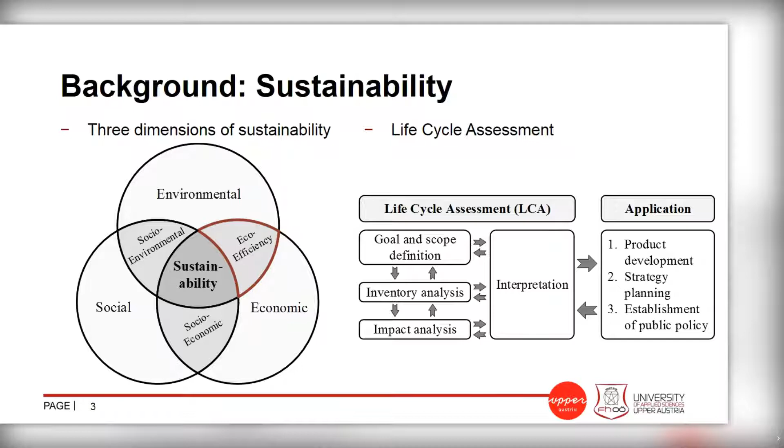There already exist a lot of methods for analyzing the sustainability of products or services. One well-known method is the life cycle assessment, where you want to analyze the impact of a product. You have typical steps like the goal and scope definition. Then you have to gather all aspects, all data, and then analyze the impact of this product and also interpret it for your daily work in product development and strategy planning - what you can do with this aspect.

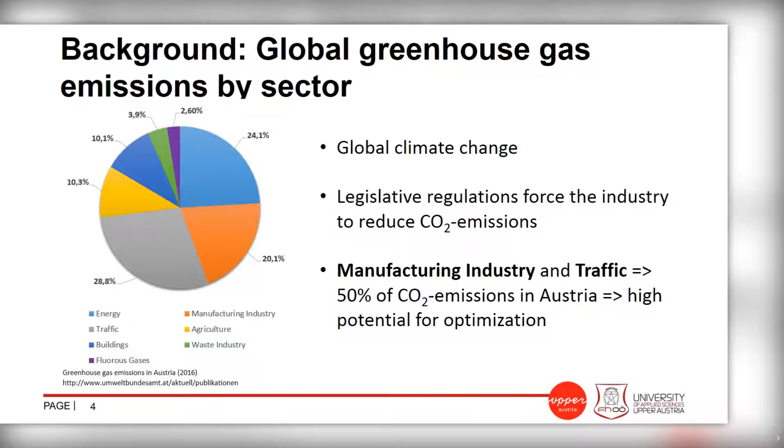On the other side, the question will be, how can mechatronics help it? If we look at global greenhouse gas emissions, for example, I have a diagram from Austria showing that 50% of the CO2 emissions are coming from the production and manufacturing industry and also from traffic. And here also mechatronic systems can help us.

Another important aspect we have to consider is how can I manage the environmental indicators, which indicators are necessary for the different aspects, like focusing on the carbon footprint, land use, air pollution, and so on, or if we only focus on the results, the global average temperature.

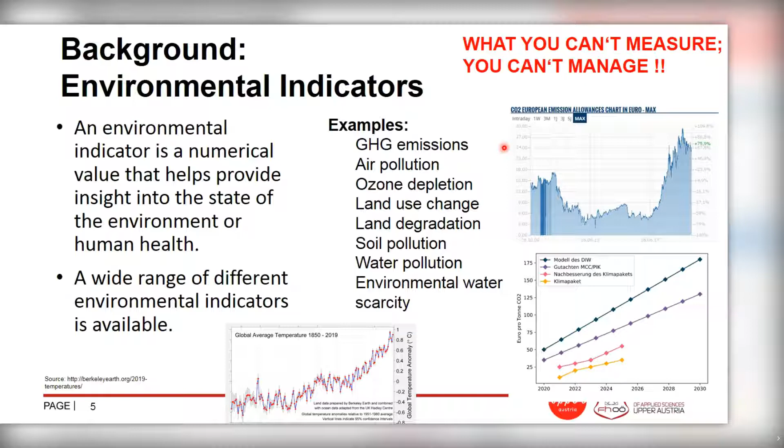And also we have economic aspects. We have a price for CO2 emissions, especially if you can see a chart from Europe in the last years. How can mechatronics help this?

Mechatronics is the integration and interaction of different disciplines like mechanical engineering, electrical engineering, IT, and control design to help promote a cleaner future, and especially to reduce - this is one aspect of Eco-Mechatronics - the ecological impact of such mechatronic systems during their whole life cycle.

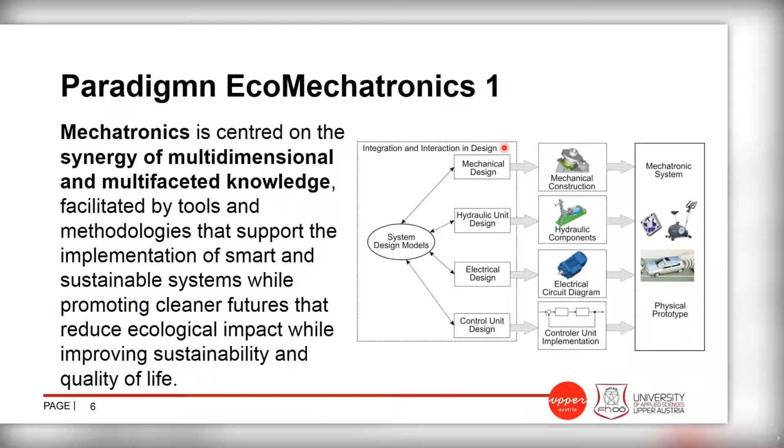Also, the vision of Eco-Mechatronics is to improve human behavior and also the quality of life. Currently, we have some transformation processes in industry. For example, 10, 20 years ago, we started with digital transformation, known as the term smart manufacturing or Industry 4.0.

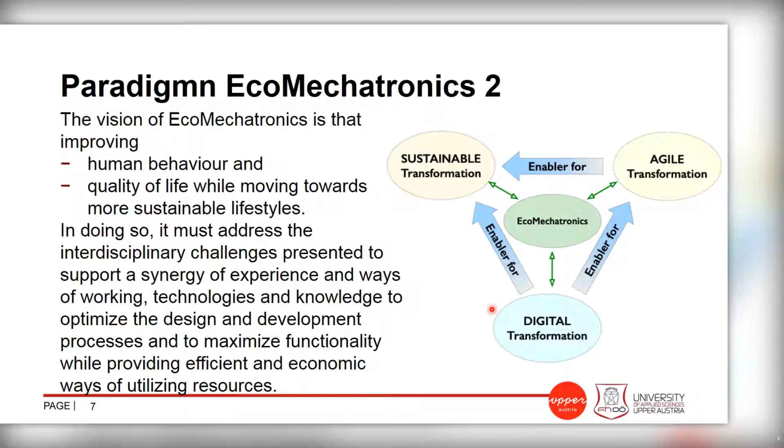This is also, from our point of view, an enabler for the sustainable transformation. These two terms are also called twin transformation. And also we have to modify and analyze the different processes, different technologies, and working with knowledge in companies, so an agile transformation process is also very important. Therefore, Eco-Mechatronics helps support these different transformation processes in companies.

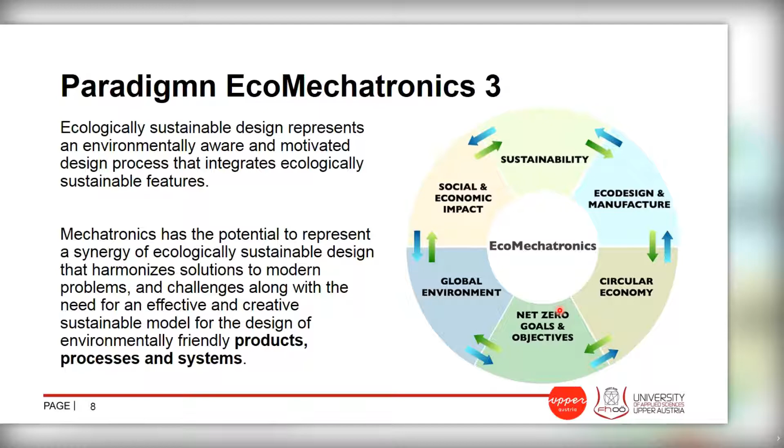And here also the different environmental aspects are represented. You can see in the figure on the right, we have the focus on the global environment. Also a very important task, which I want to discuss with you later, is circular economy, the design process, and also the net zero goals. So Eco-Mechatronics can be a sustainable model for the design of environmentally friendly products, processes, and systems.

If we go into more detail in Eco-Mechatronics, it is always very important to analyze the whole life cycle of a product, to have a holistic view on all life cycle stages. You can see here the 5 main stages in a life cycle of a product.

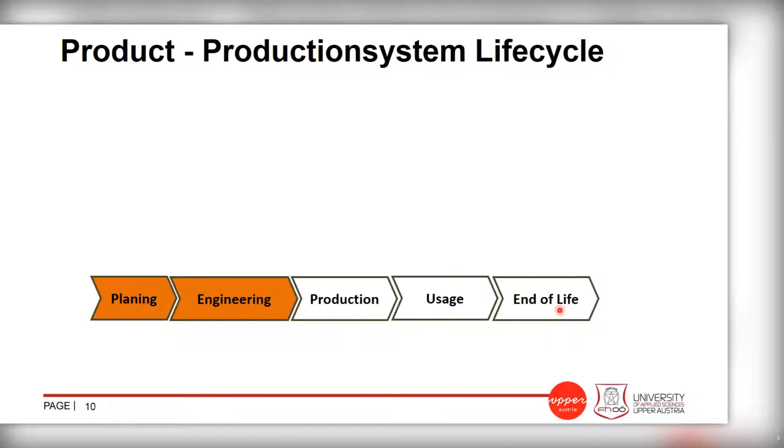You will start with the planning process, where you have strategic planning, where you define the concept of your product. Then you have a very important phase, the engineering phase of our product, where some methodologies on eco-design can help. Afterwards, you have the production of the product, of the mechatronic system.

Then you have the usage, where you also need some specific monitoring service systems. And at the end, you have the end of life of our product.

You have also the same phases if you focus on the product being produced by a production system. You have the same phases in the life cycle of a production system: you have to plan this system, you have to engineer it, and then you have the interaction between these two life cycles in the operation phase.

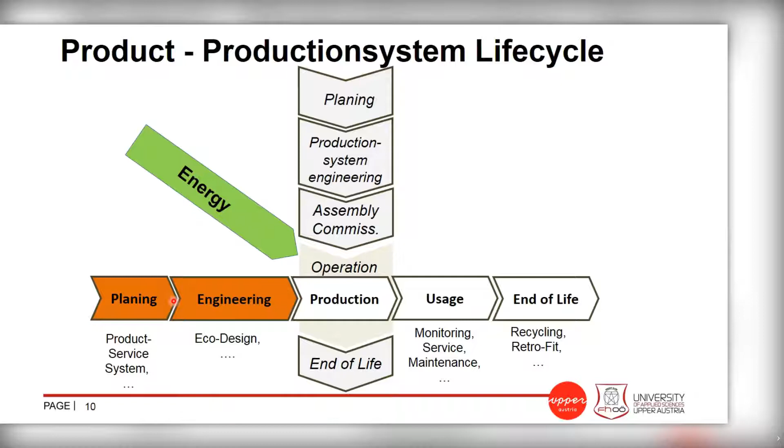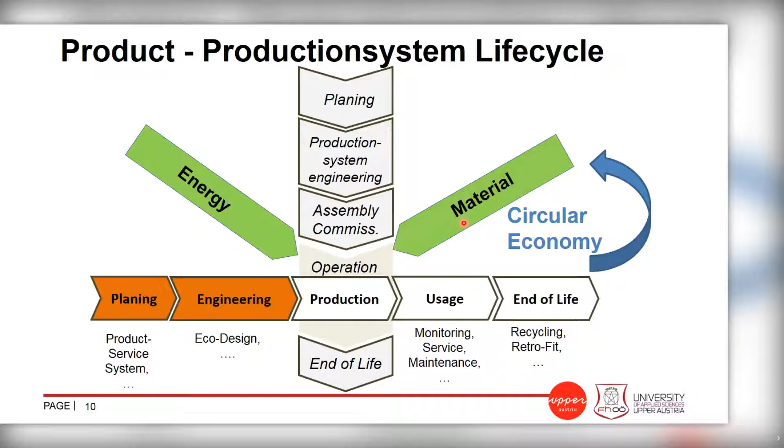This is also, for environmental aspects, very important. For the production of our product, we need energy and also we need materials. Therefore, it is also a very important loop to use these materials for the production. Then you use the product, and at the end of life, you will reuse these materials. You also know the term circular economy.

Now, from our design point of view, the early design phases of a mechatronic system are very important because we have a high freedom of action to improve and influence the environmental properties of the mechatronic product. But this is also a challenge for us.

The knowledge which we have about the product is very poor. But in this conceptual design phase, we make the main decisions for the success of a product and also the environmental impact of the overall system. Eco-Mechatronics can help us to improve the decision process in these early design phases.

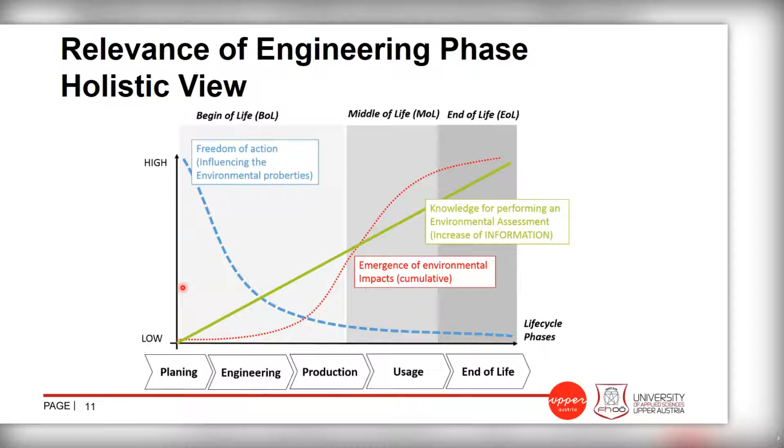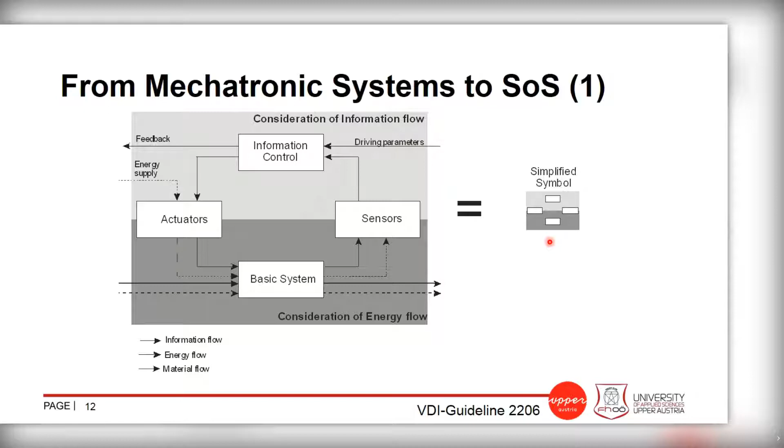And then in the virtual or cyber room, we have the information control of this system. So typically, a mechatronic system is the interaction between these different disciplines. We have some aspects on the physical parts of the system and some aspects on the cyber part of the system.

In larger systems, we have not only one mechatronic system, one production system, but a network, for example of production systems, and this network is physically connected and also has an integration network of computation. Therefore, the term cyber-physical systems is used. And if I connect all the systems, then the term systems of systems is used.

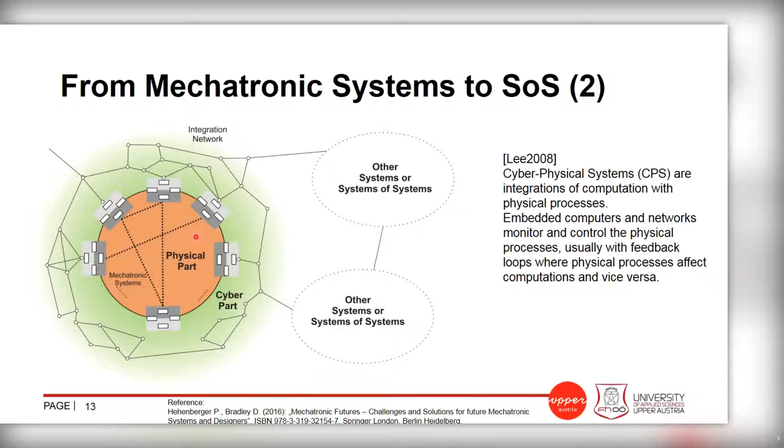These are some aspects of the digital transformation of mechatronic systems. Why is this important in the Eco-Mechatronics paradigm and for environmental aspects in a system? I give you a simplified use case.

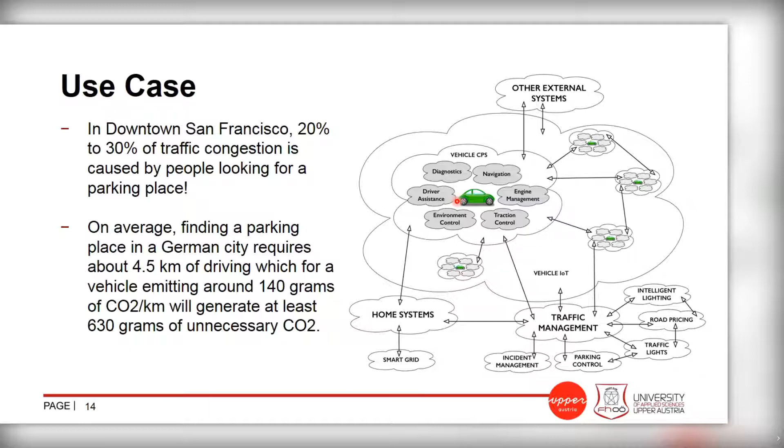In this simplified use case, which was prepared by David, you will see that in cities like San Francisco, 20 to 30% of the traffic is only people looking for a parking place. Now such a digital system can help to reduce this traffic in such cities and also helps the environment to reduce the carbon footprint.

On the other side, the Eco-Mechatronics paradigm is also the evolution of different applications. If you look at typical mechatronics 50 years ago, you have some systems, sensor systems, industrial robots.

Now we will go more to a cyber part, also to integrate virtual models related to a cyber-physical system. Afterwards, you can go to cloud-based systems, Internet of Things, where Eco-Mechatronics is one building block to support this aspect, like smart cities, smart home, what I have shown, and autonomous vehicles.

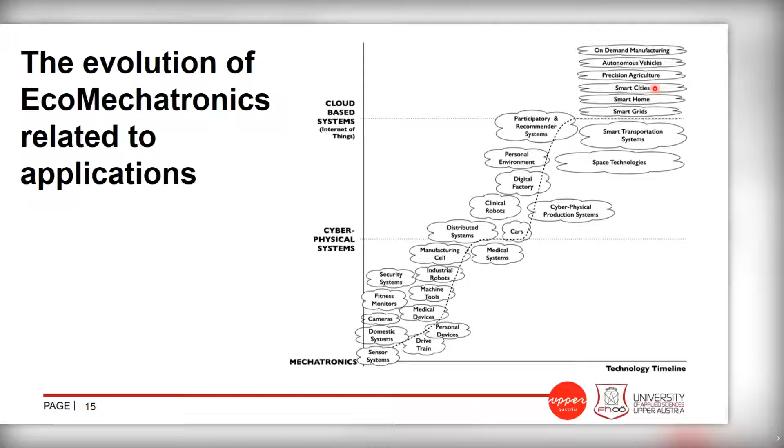On the other side, it is important that we also take into consideration modeling and simulation techniques. Therefore, the term digital twin exists. Digital twin means the interaction between the cyber world—the data, the models, the information—and the physical world. And between these two worlds, I always have an interaction to describe the properties of the system, to analyze the real condition of our mechatronic system on different system levels.

And therefore, it is also possible to predict the system properties in advance for the future. This is also a very important aspect which helps Eco-Mechatronics.

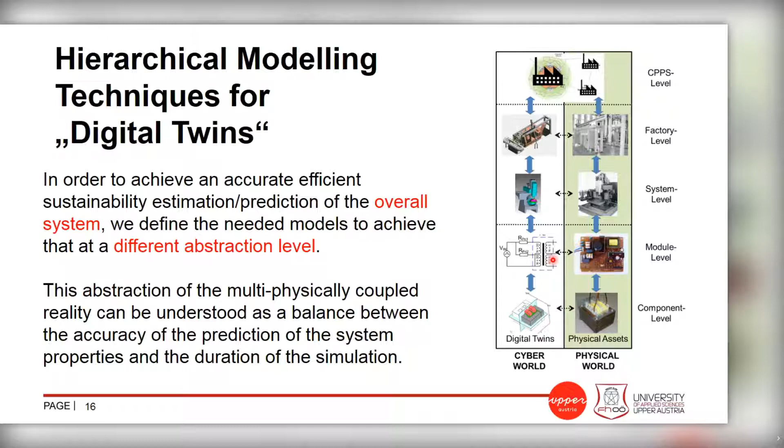At the end of the presentation, I want to give you a quick overview about one possible use case. I will present some activities of the Horizon 2020 project, Energy Efficient Manufacturing System Management, which helps reduce the energy consumption during the production of different systems.

Maybe you know terms like factory of the future. Therefore, we have, as I mentioned before, to integrate all different aspects of digitalization to get an energy sustainable solution related to energy consumption, energy costs, and also CO2 emissions.

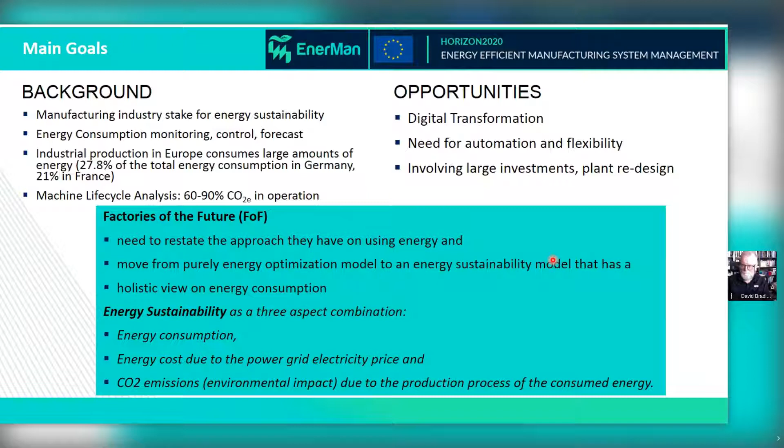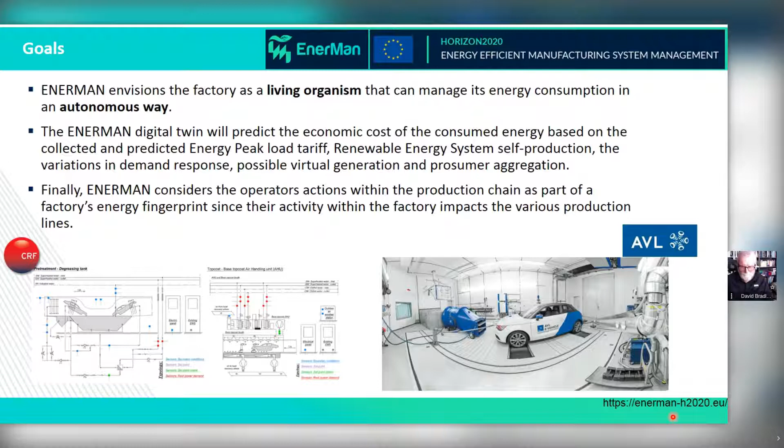If I look at my clock, I have only one minute to show you some details of this project. You can also find a lot of information on the website of the project, where the goal is that the factory is a living organism to reduce energy and costs in a production plant.

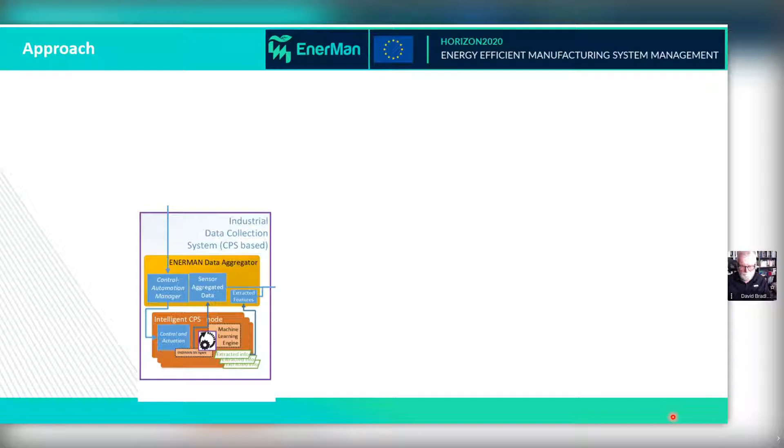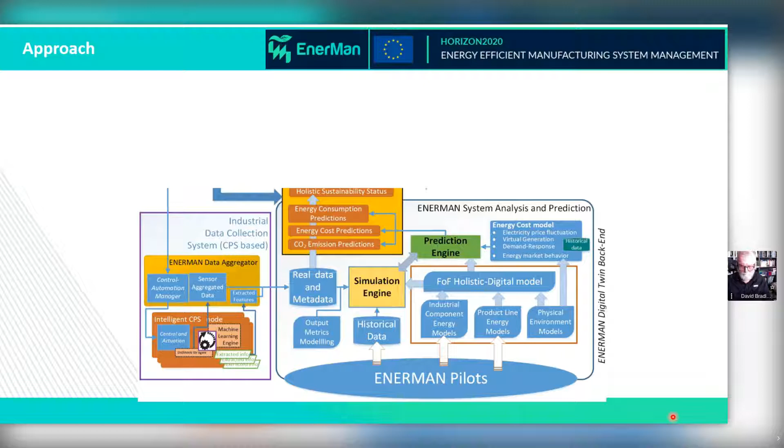Therefore, the overview, the approach which will be used, we have discussed before. One important aspect is to have information, data from the industrial system, like a cyber physical system. Then you need models to simulate the process and also predict the energy flows in the future. At the end, you have to integrate all this data, maybe with big data analytics, to have decision support during the production process.

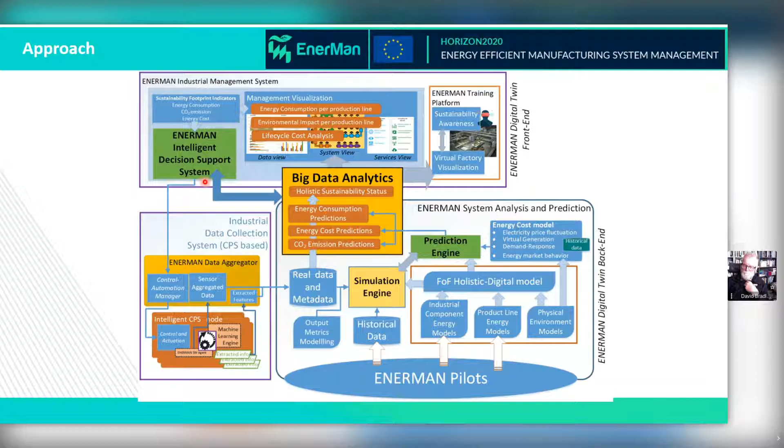This project shows you that the different aspects of Eco-Mechatronics are used there to reach a sustainable solution for a production system.

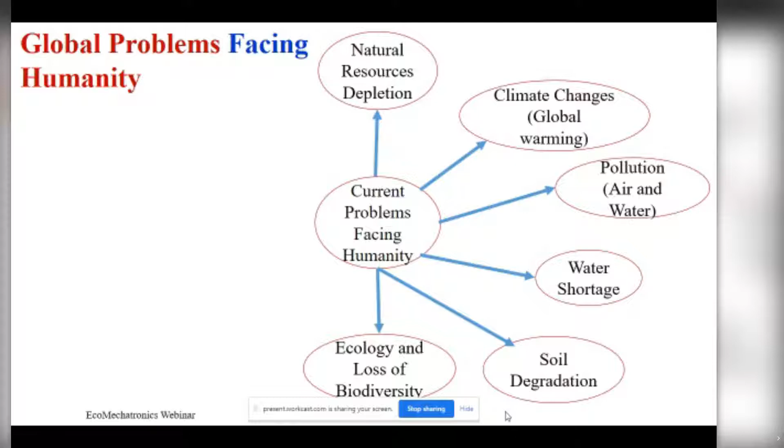Also, the deforestation, when you're removing trees, an essential element integrating into its life cycle a lot of species and ecosystems, removing them is heavily affecting the environment and the chain in the ecosystem itself.

We have ocean acidification due to the release of a lot of polluted chemicals, the overpopulation in the world and the demand for space and all the lifestyles that support such populations. And we have waste disposal. In general, there is a lot of effort to reduce its effect, but still it is considered an unsustainable waste technology.

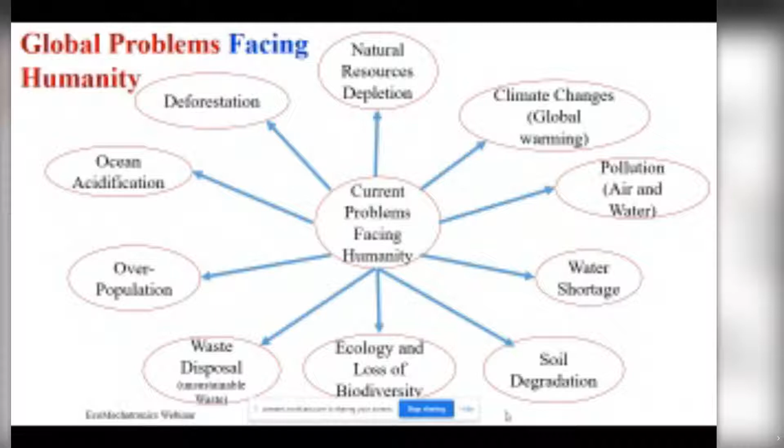So from that, we can look into the why of Eco-Mechatronics. I was trying to put a definition, but the definition is not the definition, because the field is still at an early stage and still open to be evolved and take shape in a good way through the activities of many researchers in the field.

But I can state that Eco-Mechatronics can be defined as an interdisciplinary and visionary field, evolving to a holistic impact on the development of current and future technology. Such future technology may include smart technologies, methodologies, algorithms, techniques, products, systems, and processes. While developing this, the focus is going to be on sustainability, ecology, economy, and circular economy.

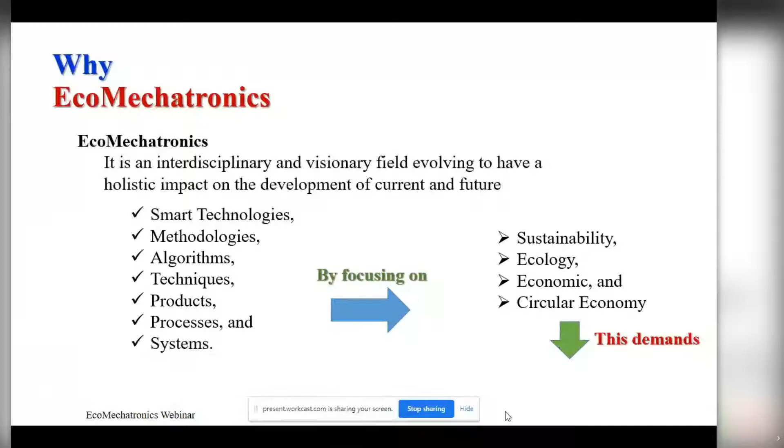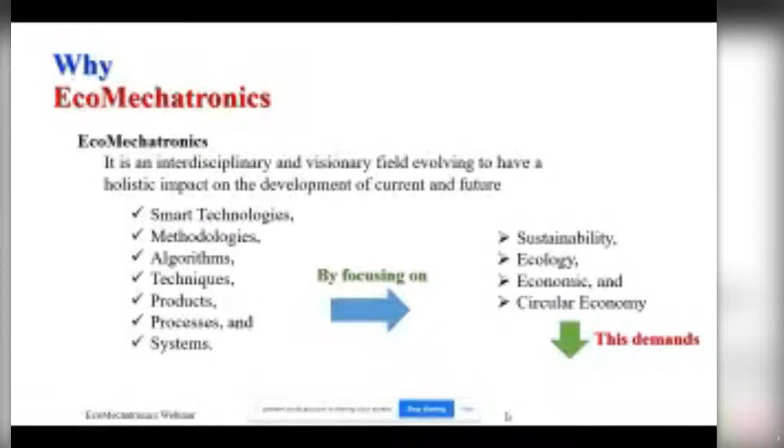The circular economy plays the role of management, to facilitate and maximize the outcomes of effort in such development from the Eco-Mechatronics side, reflecting on sustainability, ecology, and economy. To achieve this goal, there is a need to develop novel design strategies supported by creative thinking leading to new ideas. So here, Mechatronics is associated with new thinking and the development of innovative new ideas.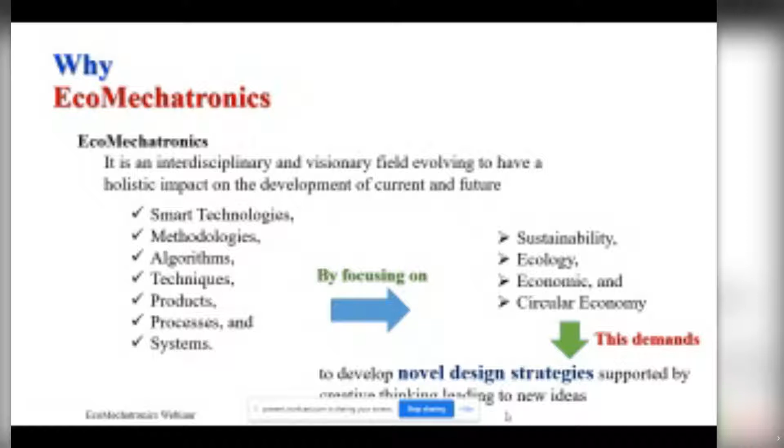The aim is to address interdisciplinary challenges with a potential synergy where in experience and way of work, in technology, and in knowledge, all of that are going to contribute to optimize the design development process and maximize the functionalities.

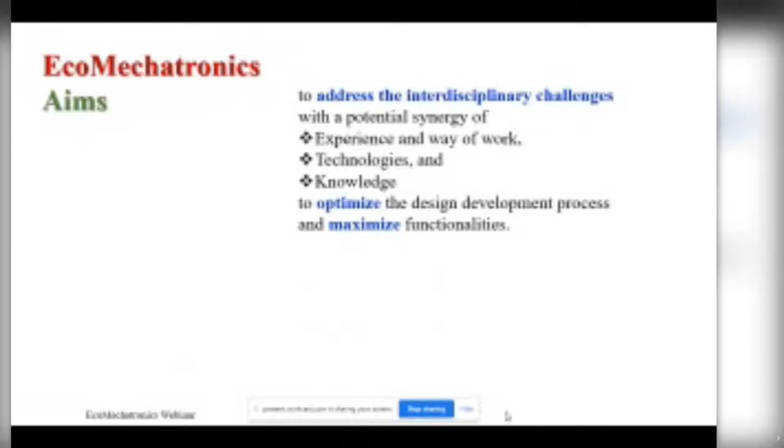So the synergy here is leading to develop a new energy efficient, renewable and clean energy, economical, sustainable, waste reduction or elimination. The target of the Eco-Mechatronics is not just to reduce, it's to eliminate, but along the process it can go into different stages and have environmentally friendly technologies in general.

Once again, the circular economy concept is playing a key role to combine all of these efforts that are going to facilitate and manage the outcomes leading to an ecologically sustained society.

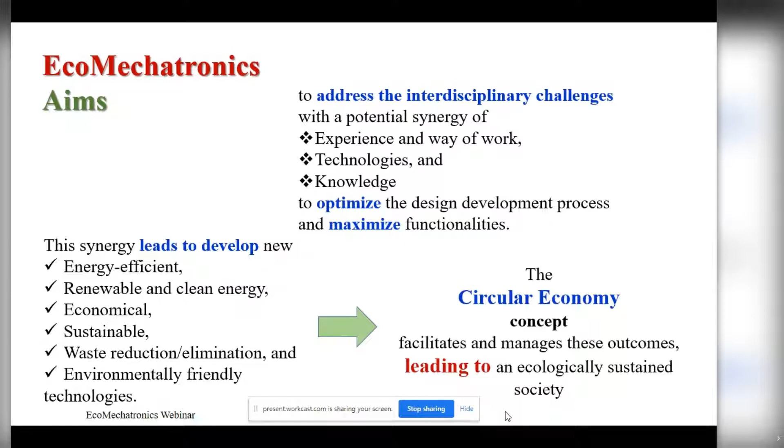So when you talk about the evolution of the Eco-Mechatronics, already we are feeling it, sensing it, and seeing it growing gradually, to support the effective design and development of Eco-Mechatronics product systems and processes. The vital issues we need to understand through this process are the application, the consideration of the application, the ecosystem, the environment, sustainability, and the eco management for effective outcome.

Because all of the problems facing the world have a direct effect on the ecosystem. When you are developing a technology, the consideration of the ecosystem is very critical, because that will tell us and guide us about the whole process of the contribution of the developed technology on the environment, and also the cycle time of such a technology within the ecosystem consideration.

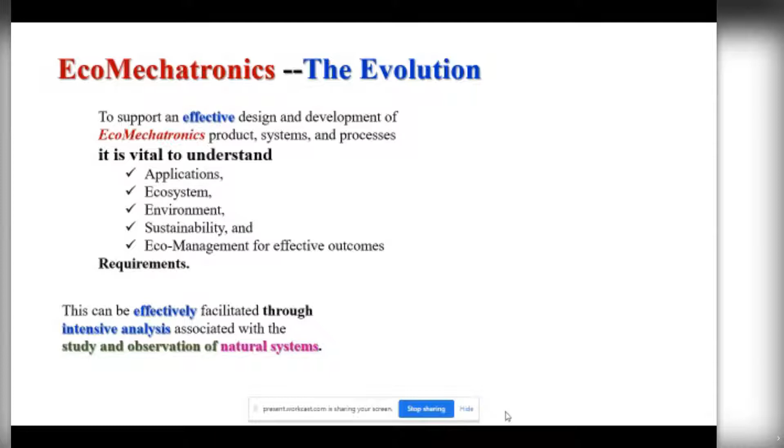So this consideration is effectively facilitated through intensive analysis associated with study and observation of the natural system, because nature will be a very good lesson and model for us.

It is to consider the goal, aiming to have a conscious conclusion to emulate nature's best properties and functions. Nature includes all physical systems that we can learn and understand and reflect out of, to support the development of new technologies, specifically led by the Eco-Mechatronics field.

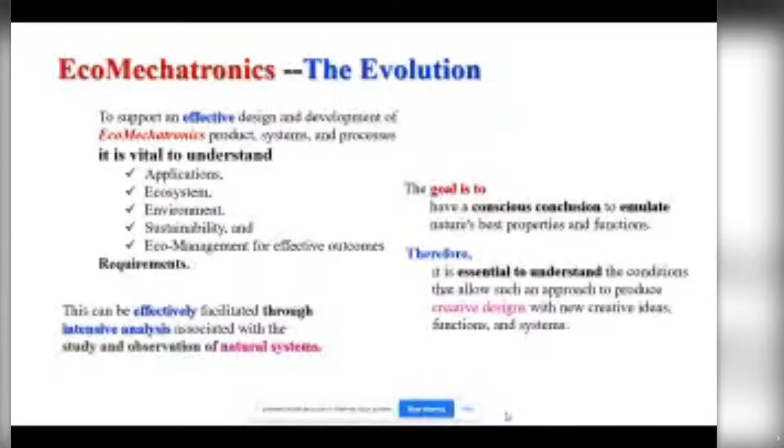Therefore, it is essential to understand the conditions that allow an approach to produce creative design. This creative design leads to creative ideas, functions, and systems. Creative design by nature is a potential way to support environmentally friendly and innovative technology development.

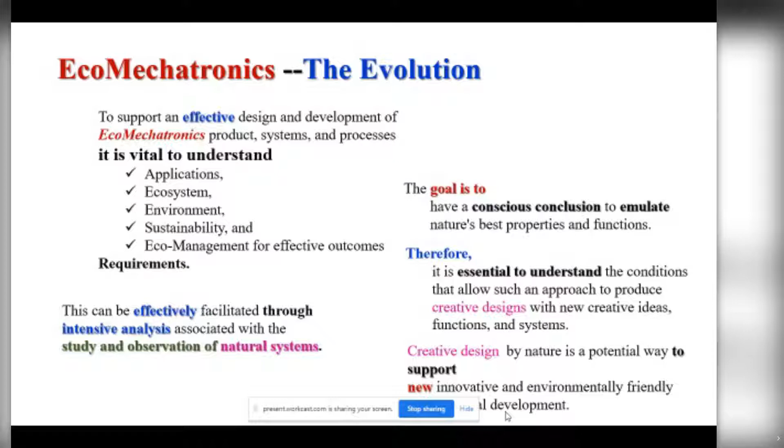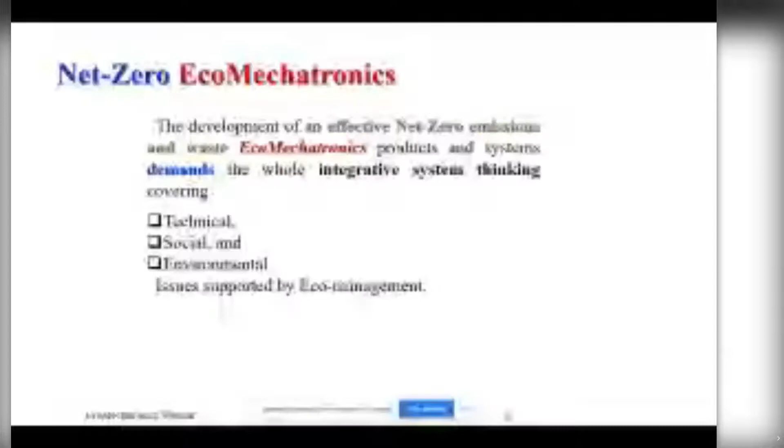All is aimed at having a net zero emission and waste in general. We are aiming, through this technology or through this field, to show that the Eco-Mechatronics is going to contribute to this goal, and the development for the Eco-Mechatronics products and system demands having a whole integrated approach.

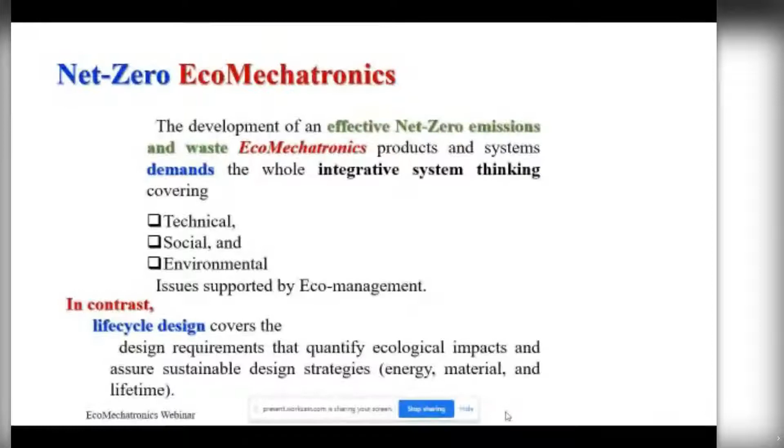For the purpose of having a net zero, Eco-Mechatronics needs a whole integrated system thinking covering technical, social, and environmental aspects. This issue is going to be managed properly through eco-management. In contrast, life cycle design is normally influenced by the view of considering energy, material, and lifetime, without linking the matter with the ecosystem and subjecting it to the eco management and social aspects of that.

So we need to think about what kind of current evolving technology is going to support the evolution of Eco-Mechatronics. We have many aspects of technology currently used that are evolving, some of them, and some are still in the early research of development. I'm categorizing these technologies into five groups.

The first group is related to computing. So we have distributed and optical computing, DNA data storage, miniaturized computing technologies, molecular computers, neuromorphic computers, quantum computers, etc.

And we have digitalization, where there's a huge effect and focus on digital transformation. This includes a lot of domains in artificial intelligence, blockchain applications relating to that, cybersecurity and privacy protection, digital twins, real-time insight, optimization, and decision making.

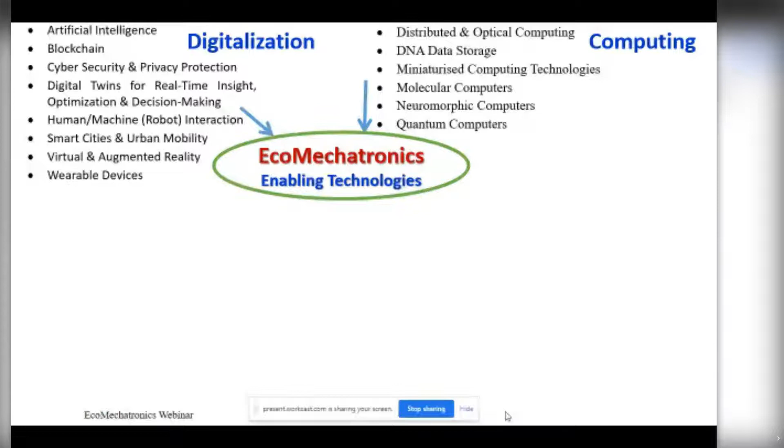We have human-machine interaction that supports a lot of issues, one of them related to robots and robot autonomy. We have smart cities and urban mobility, virtual and augmented reality, wearable devices, etc.

And we have another category supporting as enabling technology for Eco-Mechatronics: the artificial intelligence domain in general, which includes a very wide range of activities, almost involved in all domains of development related to smart, intelligent decision-making, machine learning, real-time learning, deep learning.

We have autonomous systems, obviously seeing autonomous cars, robots, vehicles, drones, undersea, etc. We have big data, data analytics, and data fusion, connected devices, Internet of Things, CPS, etc., real-time interaction, and a wide range of applications.

We also have huge evolving activities and research in the domain of nanotechnologies, ranging from biophysics, micro and nano manufacturing, nano computation, nanomedicine, nano robotics, nano smart materials, and green technologies.

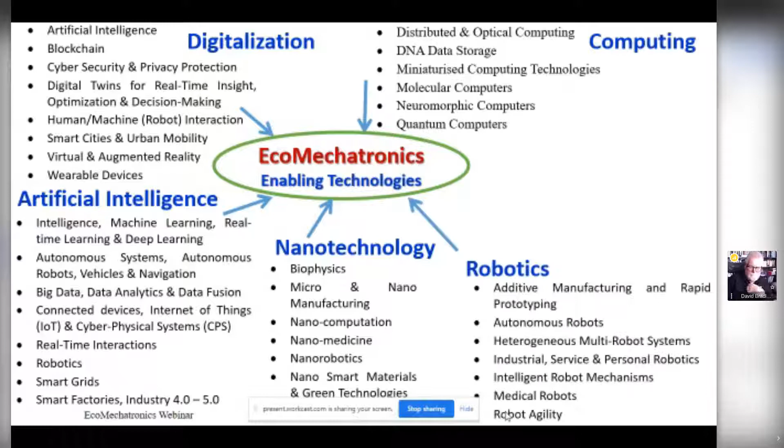We have also huge development at the level of robotics, from additive manufacturing and rapid prototyping, to autonomous robots across the spectrum of air, sea, and ground. We have heterogeneous multi-robot systems involved in many applications, either co-located within the same application space or distributed around the globe, and intelligent mechanisms for reconfigurable, agile, medical robots, etc.

In general, we can categorize the huge evolution and development of service robotics, supporting human beings in different dimensions, and also the development of personal robots besides the focus on industrial applications.

We have the development of sensors and actuators that give flexibility to different developments, either on the robotic side or the nanotechnology side or other levels, to give knowledge through abstracting information from the working environment and decision making into action. This normally comes from sensors and actuators, and we have different enabling technologies in this direction, coming from actuator design technologies, biosensors, bioactuators, nanosensors, nanoactuators, wireless sensor networking, sensor actuators, and smart materials, etc.

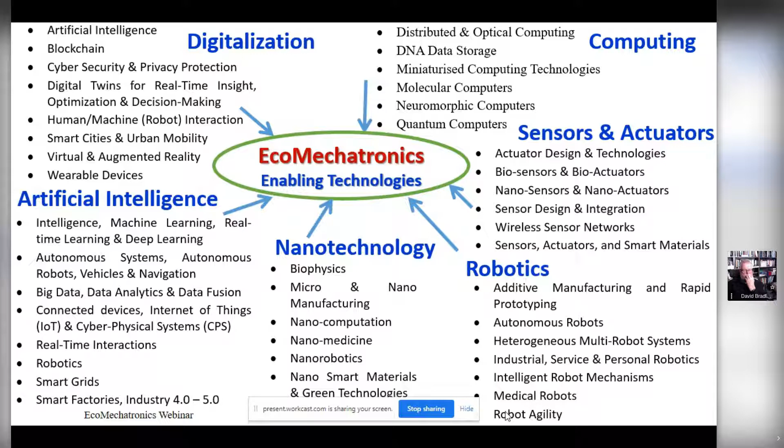Future prospects: when we're talking about future prospects, the eco and sustainable design strategies are critical issues facing the development of the field, and focusing on this issue is very important.

This will come from the development of technology supporting eco-mechatronics, from the materials that facilitate this development, the processes themselves and how to make them more effective, efficient, and innovative, and developing accordingly intelligent systems that facilitate that, with future technology applications mainly focusing on managing the ecosystem in order to achieve the target of developing eco-mechatronics itself.

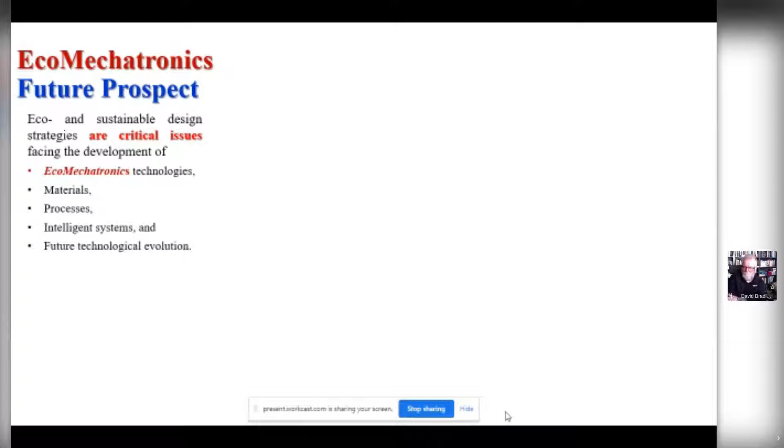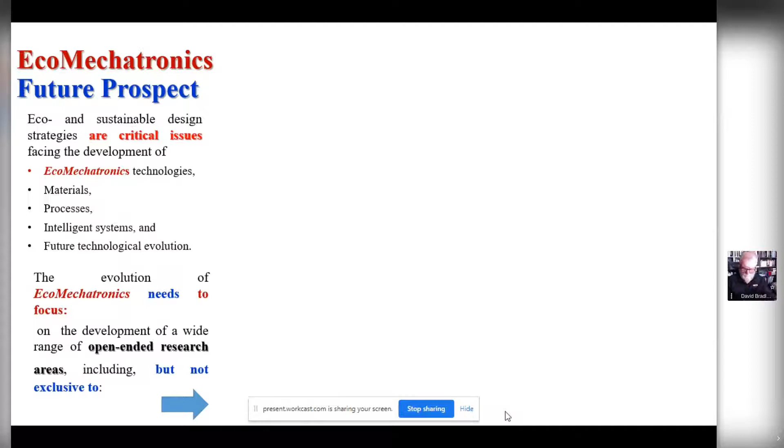Such evolution of eco-mechatronics needs to focus on different areas of research from now ahead into the future. This research is open-ended and will continue in the future. Besides, it needs additional development to continuously support the field. Some of these are listed here - I'm just going to show you the list without going into the details.

It comes from the computing level, agile systems, intelligence, biosensors, clean energy, and energy consumption technology to have lower consumption technology, distributed data analysis, decision making, eco design, management, and circular economy, and to spell out fully autonomous systems, biohybrid robots, green technologies, and eco-friendly solutions.

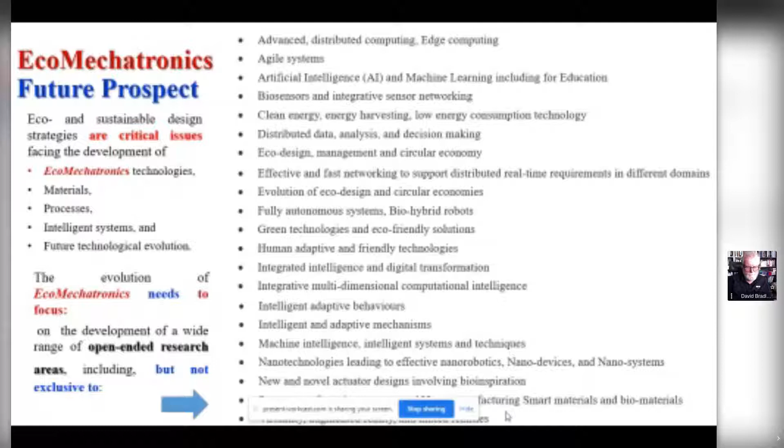We have other levels from intelligent adaptive behaviors, intelligent and adaptive mechanisms, machine intelligence. So we have a huge list of developments evolving, and all of these are open-ended research topics. As I said, we are not limiting the list to this - rather it is an open-ended example of possible research areas.

Finally, responses to mechatronics come into three levels and actions. The short-term level we already can feel and sense. This is going to use existing technologies and synchronize them with the degree reflected by the background of eco-mechatronics, coming through research already done, through publications, through books, through different organizations focusing on the issue of environment, sustainability, and circular economy.

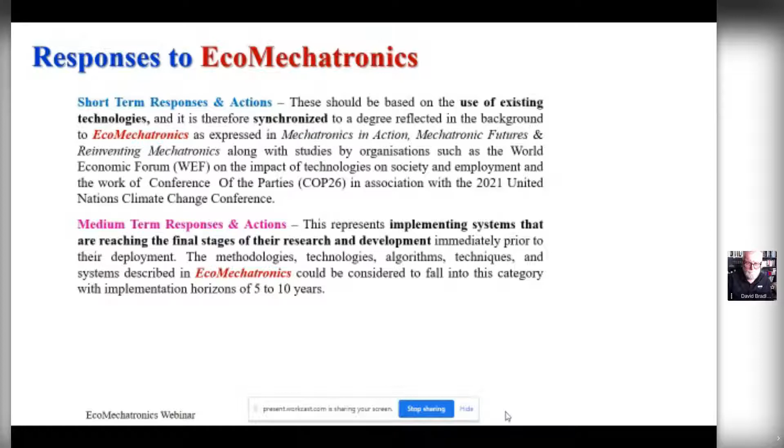We have work on medium-term responses and actions - this is normally implementing systems that are reaching a final stage of their research at this time, because there is development and then applying that development to real projects. So this research is before reaching the project and industry level. This will be evolved in the medium term, between 5 to 10 years, to see different new technologies, methodologies, algorithms, and techniques adapted to support the evolution of eco-mechatronics.

Finally, we have the long-term responses and actions for the field that will be initiated with new work, new teams, new topics. Researchers are going to consider reflecting the key elements I mentioned earlier - sustainability, environment, economics, and managing these through the circular economy.

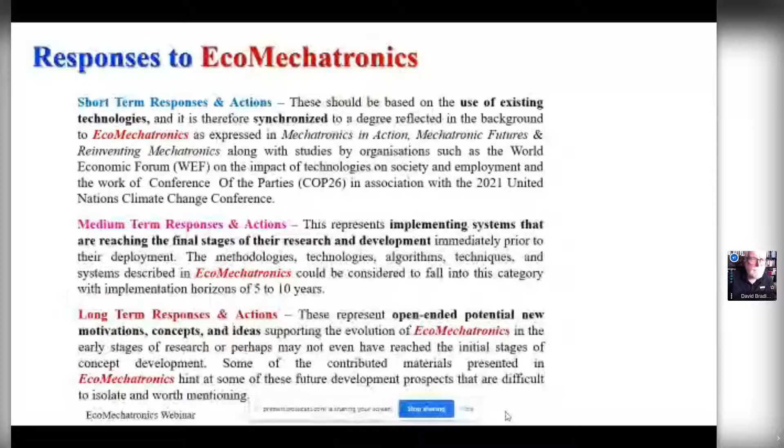Okay, Peter, can you hear me? Yes, David, I can hear you. I'll just wait for Mackie to come and check there, and then we've a number of questions.

The first question is from Caetano Peng, about the cost of implementing Eco-Mechatronics. Could this be a barrier in many industries and sectors, and do we have any idea of the basic costs associated with implementing the technologies you've been talking about?

Peter, would you care to have first go at this, about the costs? Basic cost, it's a very interesting question. We have to analyze for which companies it is relevant, because we have large companies, but also, especially in Austria, small and medium-sized companies, and therefore the cost for new technologies is a barrier. I cannot say a number on it, what the costs are.